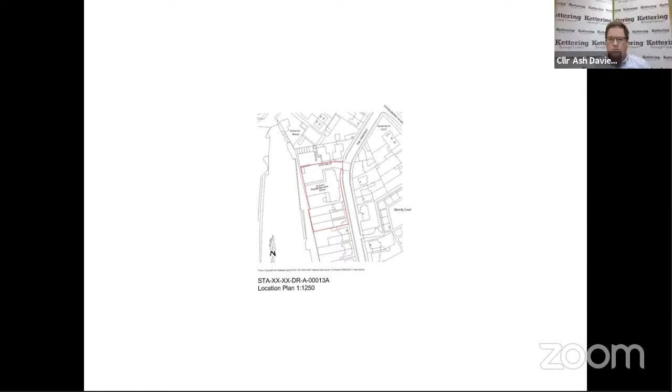This application is on the Crescent in Kettering within the Headlands area. It's an existing care home, St Anne's Residential Care Home. The proposal is for a 2-storey side extension, and to facilitate that, there is a need to demolish 3 dwellings, which you can see within the location plan to the south of the existing care home. Part of the aim of the application is to provide a net increase of 13 ensuite rooms, but also to provide additional dementia care as part of the wider care home offer.

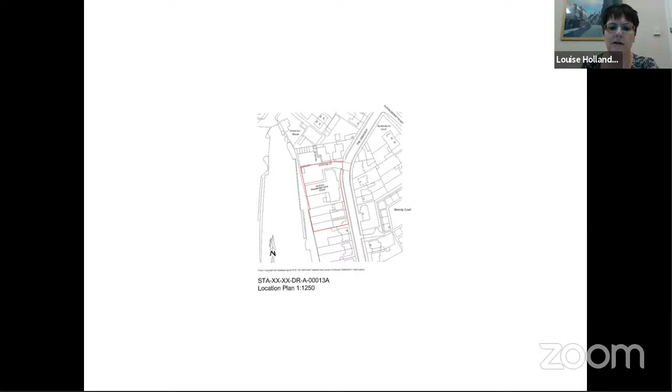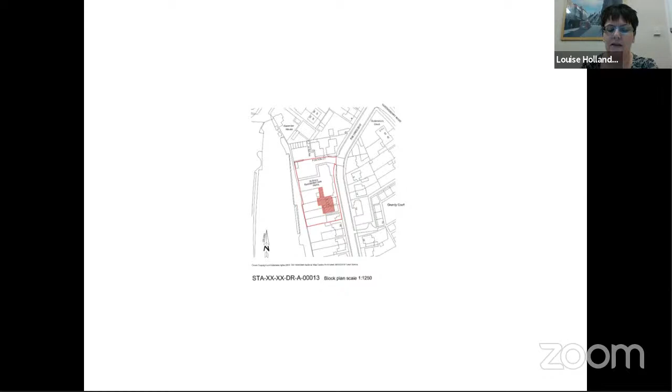There's also enhanced facilities within the care home as a result of the application, and increased garden space. There's also a balcony proposed at the first floor, which I'll come back to, to the rear of the property. If we could move to the next slide, please. This is a block plan showing the location of the 2-storey side extension. As you see, it's covering 2 of the properties to the south, 28 and 30 the Crescent. The other property to the south, number 32, will also be demolished, but that is to make way for an additional secondary access point that will provide access and space for staff parking. So that's essentially the proposal. If we could move on to the next plan, thank you.

As you can see, in terms of the existing care home, it's arranged in a sort of T-shape layout currently. Before we get into more detail of the report itself, just a few comments around the principle and the policies relevant to this particular application. There are a number of applicable policies, and the report is very comprehensive in terms of its assessment of the principle. Overall, officers consider that the application is acceptable in terms of its actual principle.

However, there are a few policies which I'll just mention. In terms of the area action plan for the town centre, there is a specific policy around the area within which this site falls, and that's policy 24, which is within the report. Another relevant policy is a saved policy of the local plan, K16, a specific policy around special housing areas, and the Headlands is one of those particular areas. So in a nutshell, the thrust of those policies is really to protect and enhance the residential character of those areas, and also to protect those areas against unsympathetic non-residential uses.

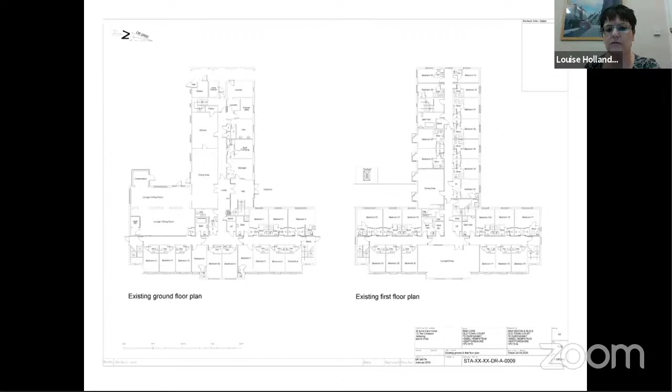Now, the officers have gone into a lot of detail to assess the application against those policies. And although this is not a dwelling house or C3 use, it does have a residential character. It is considered that, taking all those policies into account and also the policies of the JCS, that the principle of the development is acceptable. If we can move on to the next slide, please.

If we could go to the next slide please. This is the first floor part of the extension, the area on the left is the proposed extension. As mentioned, the extension has also allowed the internal reconfiguration of some of the units, which has allowed the proposal to deliver enhanced facilities for existing residents. The report details some of those uses, such as a cinema room, hair salon, and other facilities, as well as additional ensuite rooms.

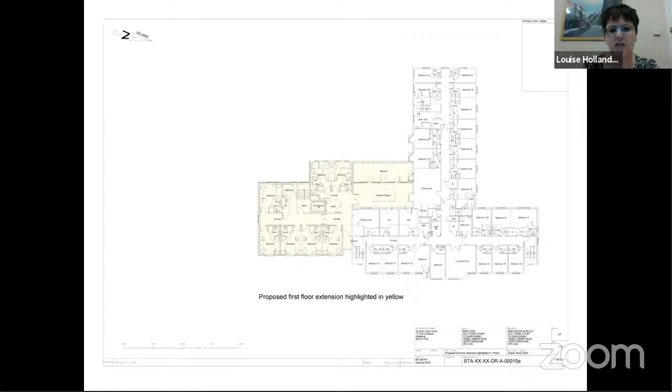If we could go to the next slide please. This is the roof plan of the proposed extension. Next slide please. These are the various existing floor plans of the three residential units that will be lost as part of the proposal. Next slide please.

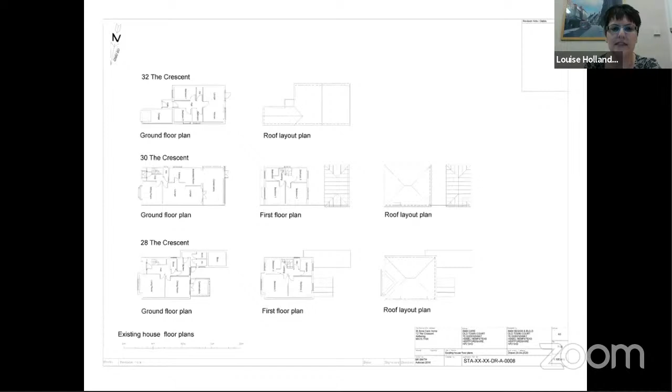This is the proposed site plan. The bluey purpley dot on the plan highlights the location of the balcony, proposed at first floor level. We've provided a blue arrow showing the distance between the edge of that balcony and the nearest boundary with number 34, the nearest residential property. Number 34 has registered an objection to the scheme, citing various concerns set out in your report. The distance of that blue arrow is approximately 26 metres.

The balcony is enclosed on the sides by the two-storey nature of the built form, so any views will be very oblique, looking over potentially to that top area of the adjacent garden. But it obviously provides an enhanced amenity space for the residents.

At first floor level, in terms of other amenity issues, there is on the side of the extension - you'll see it on this plan as a door adjacent to the access road - but at first floor level there is a window. That is conditioned and covered by condition 3 to be obscurely glazed and restricted in terms of its opening, just to stop any potential for overlooking or perceived overlooking of adjacent occupiers.

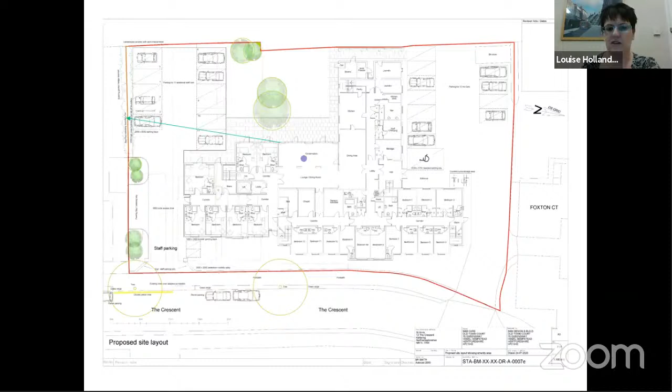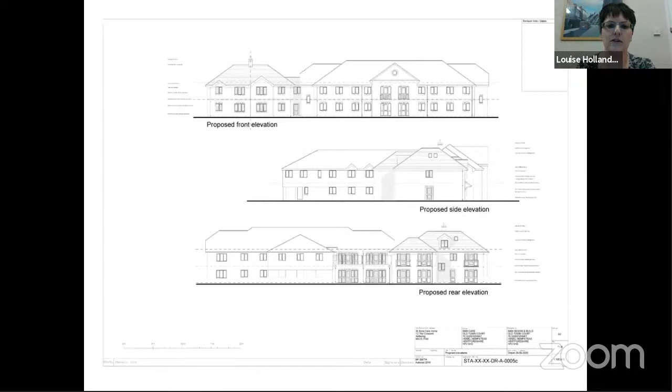This is the proposed elevations, and you'll see there's a linking extension before you get to the main two-storey extension. That's to provide visual separation, a transition into the extension, and also to enhance and maintain the residential character I was talking about before, because with the demolition of those 3 units it's important to retain that residential character, and officers consider that the design proposed does do that.

If we could go to the next slide, David. Just bear with us, Louise. It looks like it's just restarting. That sounds like someone joined on Zoom. Yeah, I think it kicked him out of the presentation there, but it looks like he's good to go now. Lovely, thank you.

So these are the existing street scene at the bottom and the proposed at the top. Again, you'll see, as I explained, the transition into the extension, which is trying to maintain that residential character.

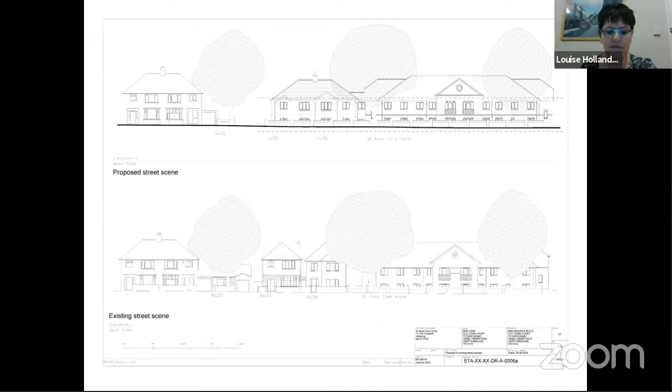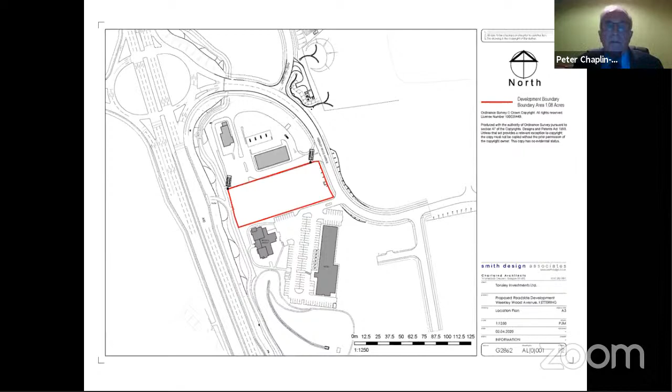Next slide, please, David. Yeah, so this is the land, it's remained fairly vacant and unkempt for quite a number of years. The report mentions its value in terms of any plants and so forth, and it's concluded there is no great value in that regard.

So this is the size of the unit, and it's going to be located towards the bottom of the site, close to the A43. You can see it's essentially a large rectangular shed building with some offices within. Next slide, please.

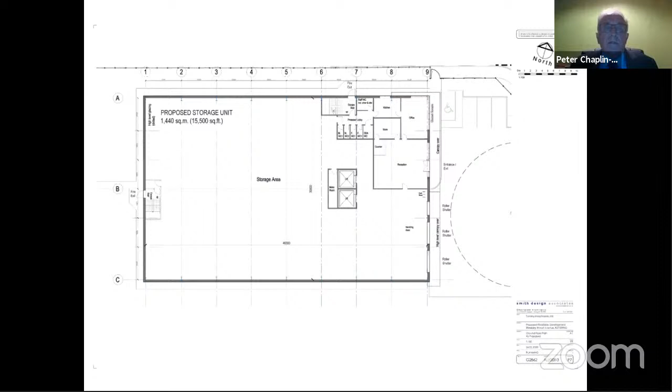So this is another detail, and I'd point out on this plan the access point, which is opposite the access point for the filling station on the north side. The Highway Authority did make a comment about these two access points not being separated by a 20-metre offset, but it's been pointed out in the report and through consultation with the applicant that the speeds of vehicles going to the petrol station and to this site would be quite slow, and it's considered that it wouldn't raise any significant highway concerns. The turning areas and manoeuvring areas have also been demonstrated to be satisfactory.

Just another point to note, towards the southern end there's an area which is subject to a landscape scheme, and I'll come to that in a moment.

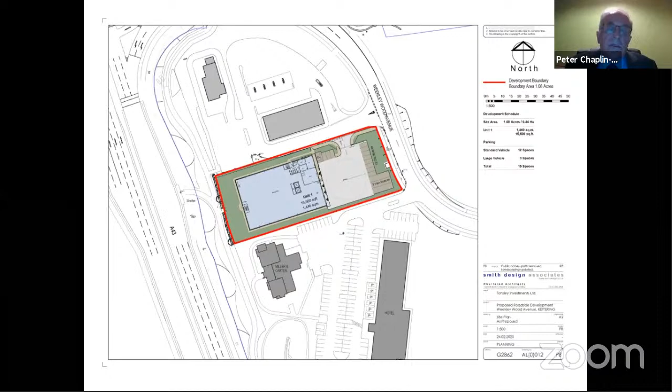So this is the proposed plan, and the point to note here is that the colours have been toned down. The single objection we had from a resident of Kettering was in relation to the appearance of the building, and you can see that there's now only one horizontal yellow strip, reflecting the house colours of the proposed occupier of the building.

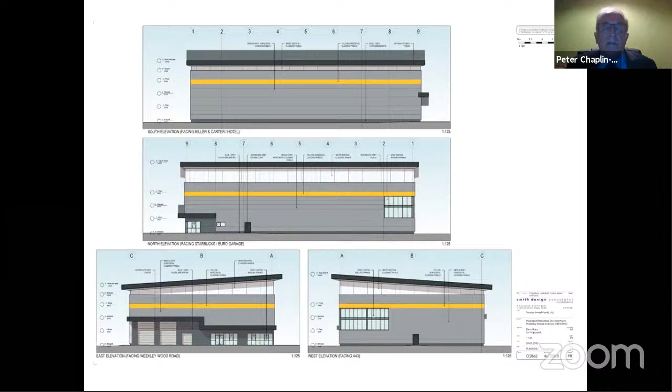So this was the original submission, which we thought had an appearance out of keeping, and that's what's been superseded. You can see the difference between what was eventually agreed with the planning officers and the applicant, and what was initially put forward.

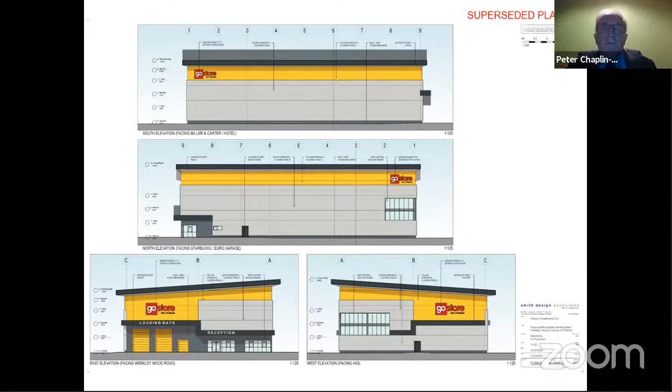I think I'll leave the slides there, please David, and go back to the landscape plan, if I may. So to take you through the officer report, as I've said, the principle of development is found to be acceptable because it's already had outline consent for business use B1.

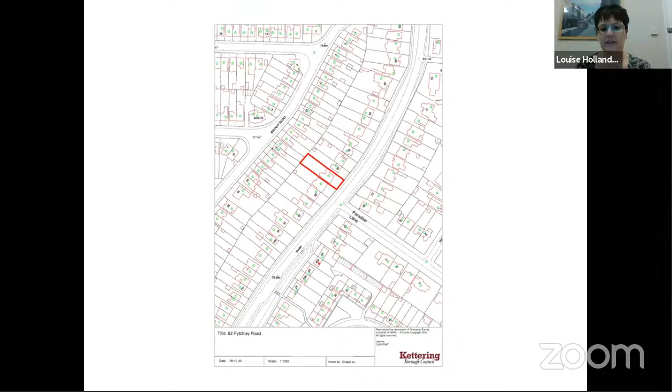Here's the location plan. If we could move to the next slide, please. And the next slide will show the block plan of the proposal. The application is for a single storey side and rear extension, and as you can see, that wraps around the side and then along the entire width of the property. It's also proposed to put 3 roof lights in the rear roof plane.

In terms of what's already on site, you'll see in a moment with the photos that there's an existing garage on the side adjacent to number 80 Pytchley Road, and there's also a conservatory on the rear, adjacent to the other neighbouring property, number 84. Those 2 elements, currently on site, will be taken down to make way for this extension.

You'll note in the report that number 80 has objected to the scheme for a number of reasons which are set out within the report in the comments section, and some of those comments relate to loss of light and overshadowing impacts on their property. Just in terms of the extension, obviously it is a large extension, which you'll see from that block plan, but in relation to the size of the plot itself, it is, we consider, to be a proportionate extension when you look at the overall size of the plot that the application property sits within.

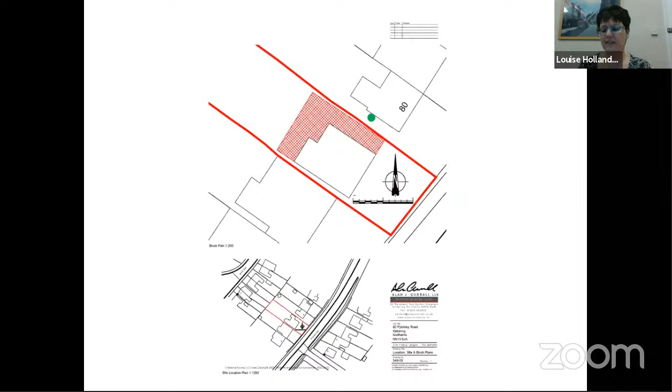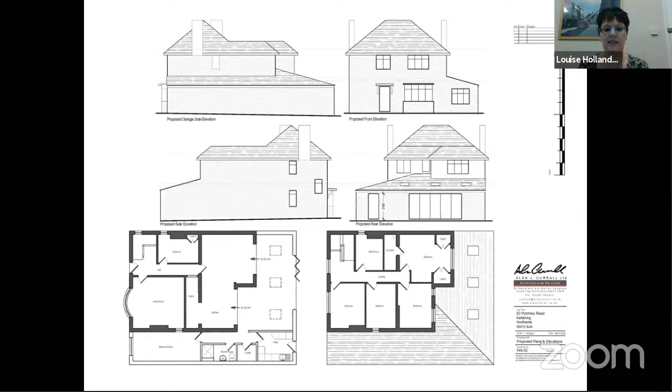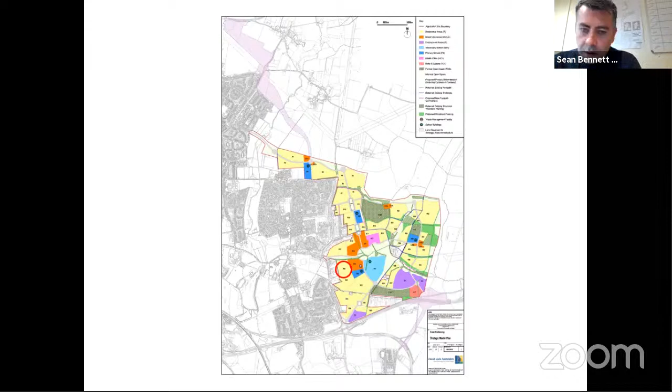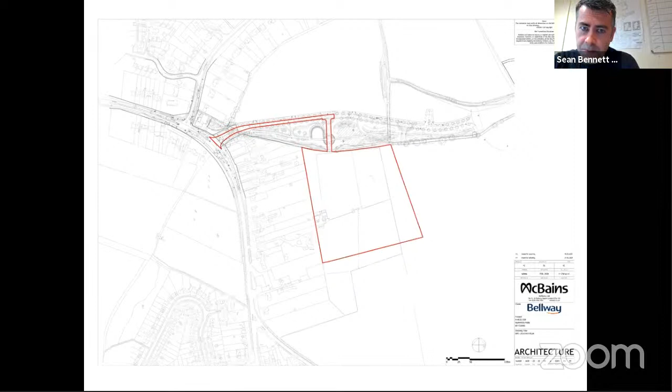The site will be served from the internal development road, which connects to the new access E road interchange close to the junction of Barton Road and Warkton Lane. The proposed linear park lining the distributor road encloses the site's northern boundary, which you can see here above the red line, and that is also underway. Next slide, please. The site is enclosed by the rear garden boundaries of Barton Road and Grendon Drive properties to its western edge.

The application seeks reserved matter approval for 167 dwellings arranged in a geometric layout with a street hierarchy including a primary street which provides site access through the linear park and through the site to adjacent parcels to the east and to the south. The other roads and mews arrangements towards the centre of the site provide secondary and tertiary streets. Access is retained to a paddock at the site's southwest corner.

A pedestrian cycle link is proposed to the southeast corner of the site, giving access to the adjacent district centre and the Hayfield Cross School, which is to the east.

Elements of frontage parking within the layout have been integrated to avoid opposing areas of frontage parking either side. In the mews areas, frontage parking has been provided sufficiently forward of the dwellings to allow a green defensible strip with planting between the house and the parking. The proposal resists a dominance of frontage parking when considered as a whole.

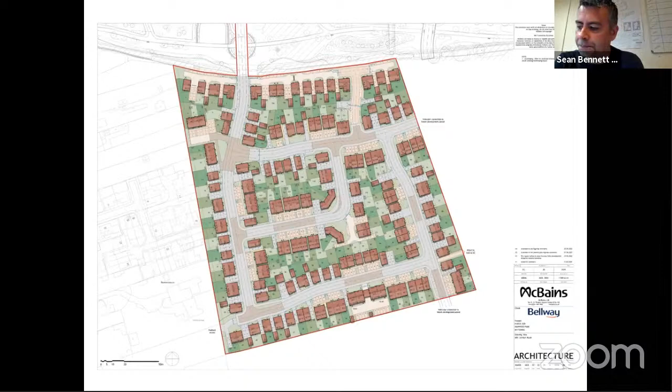This planting plan shows small areas of formal and informal planting, notably on the approach, creating a pleasant green aspect when entering the development. There is provision of wide verges and incidental planting areas at corners. Tree planting is also achievable within the mews areas between parking spaces and on the western boundary with the adjacent neighbours.

The site's northern boundary will also significantly benefit from the proposed linear park, which will provide an attractive planted northern edge. Next slide, please.

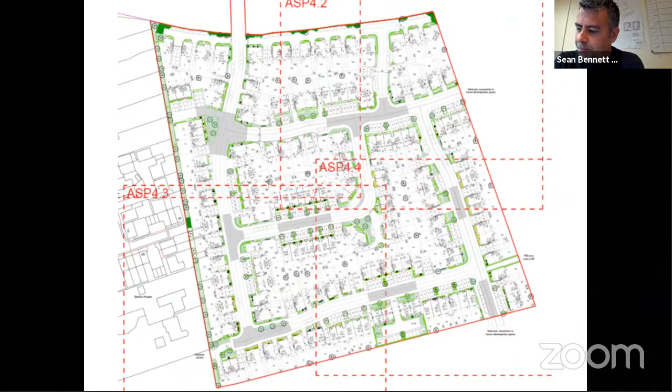This plan shows the materials palette distribution, including light and dark bricks and the distribution of stone dwellings at key viewpoints. Next slide, please.

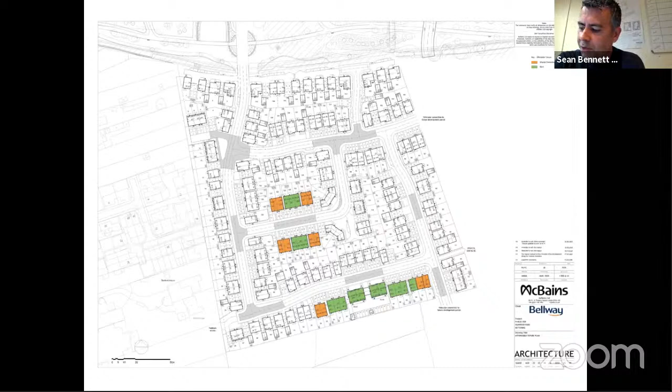This approach is considered correct for this parcel as it respects its proximity to listed buildings and Barton Seagrave Conservation Area, which are less than 500 metres to the west of the site, and is also consistent with the overarching design code in the outline that places the site in the Barton character area.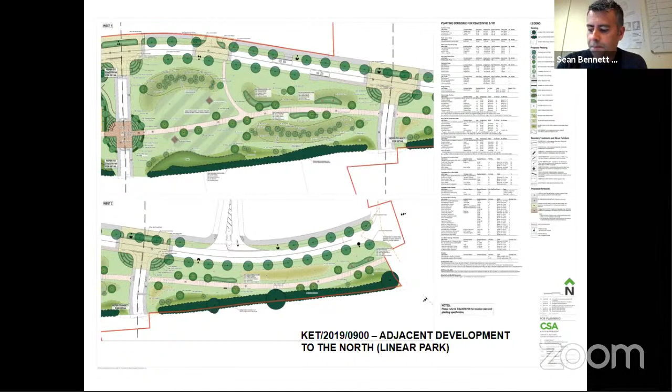Next photograph, please. This is further along that road, where you see the access to the site with the Taylor Wimpey development now on your right-hand side. You can see the progress being made on the linear park, with some retaining walls and footpaths going in there. Next slide, please.

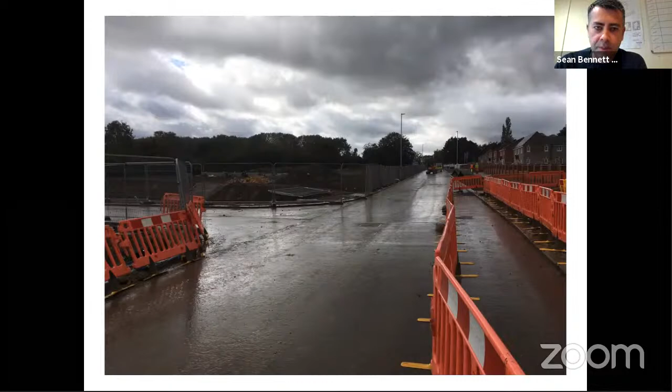This is taken from the access road, looking eastwards along the linear park. You can see the footpaths going in there. And to the right is the hedgerow, which forms the boundary of the site that will be retained.

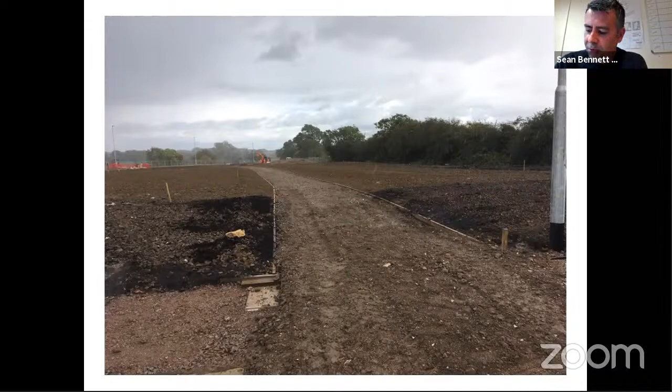Next photograph, please. Now we walk into the site. This is a long distance view taken from within the site facing the rear boundaries of the neighbours.

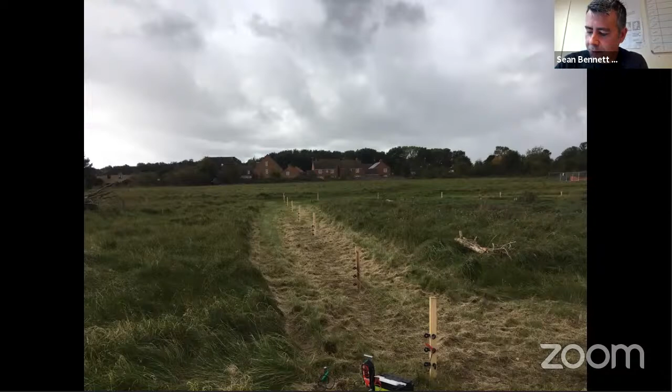The side gable elevation of 16 Grendon Drive, which I mentioned earlier regarding the side facing elevation and non-habitable room windows, is towards the centre of the image, with 11 and 12 Grendon Drive to the right with their back elevations facing the proposal. To the far left of the image is the stone dwelling at 134A Barton Road, which also backs onto the development.

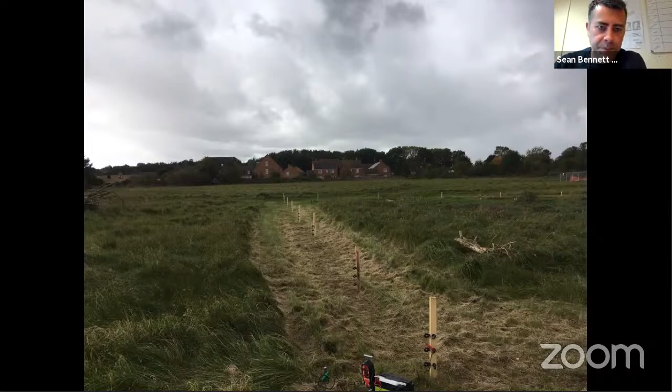The key issues of this proposal are compliance with the outline planning permission, its build quality, impacts on residential amenity, highway safety and sustainability. The submission complies with the constraints and provisions of the outline planning permission, including its approved design code, and provides a well-planned, high-quality layout and design that creates landscape interest and takes opportunities to provide green streets fitting of its suburban location, fulfilling its design code requirements as a Barton character area. The proposal protects neighbours' residential amenity and provides good standards of amenity for future occupiers.

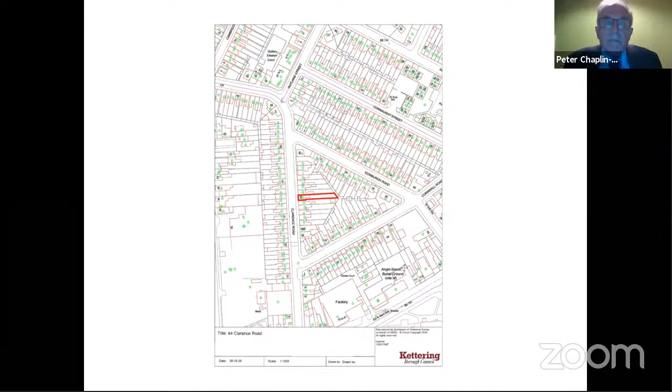Next slide please. Yeah, so these are the drawings, and you'll see at the moment this is not an unusual arrangement where on the ground floor, between the 2 terraced houses, there's a means of access for people to take the bins down in the morning and leave them and take them back at night. Just one correction on the report: on page 44, it refers to refuse storage area shall be within a separate room. It makes sense for the refuse area, the bin stores, to be somewhere within the garden area at the rear, and that can be covered by that condition.

So the proposal is to create these 2 flats with some additional small scale building at the back of the site. Next slide please.

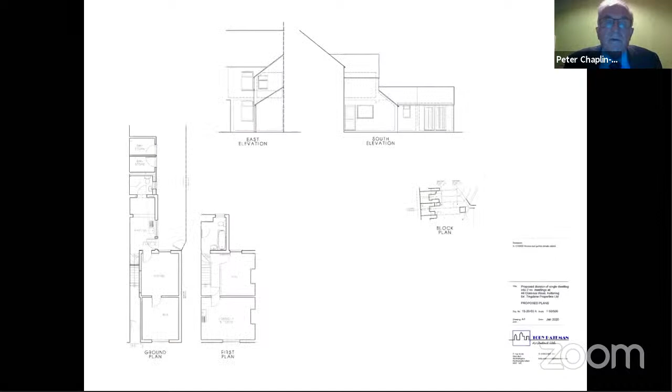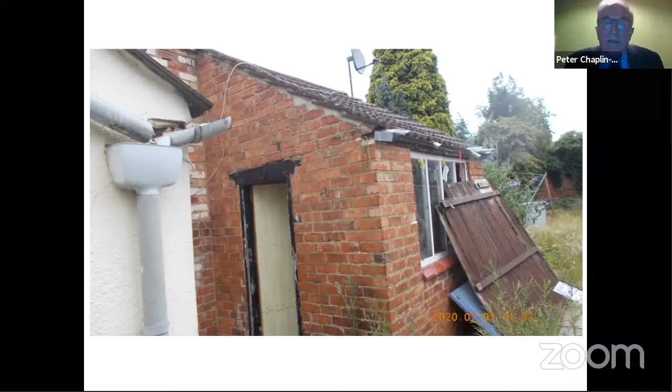Next slide, please. This is taken from down the garden. Clearly it's quite a large area. You can see from there, although it's a bit untidy at the moment, it can be suitably allocated for use by the 2 occupiers.

each flat to have a level of amenity. Next slide, please. That's just another view from the back. So I'll leave the photographs at that.

This proposal is to create 2 single flats, and the issues relate to whether this is a level of development which complies with standards. If it was a single house, you could have the same number of occupiers in the property as proposed under this arrangement.

They're essentially one bed flats, and the size of the units and the size of the flats are referred to on page 50 of the agenda. You can see the sizes for the internal floor space, which meets national space standards.

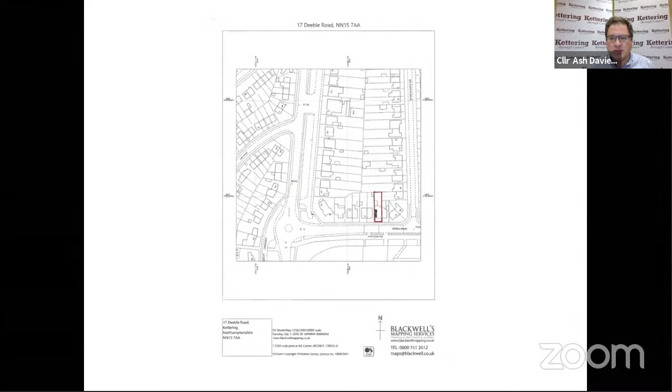That should be there, Chair. Thank you very much, David. So that is good to go. Thank you. So the application site is 17 Deeble Road in Kettering. If we can go to the next slide, please.

It's a proposal for a first floor side extension, which sits above the existing ground floor. In terms of key issues, the main one in this case is the impact on the neighbours at number 15, which is adjacent to the position of that first floor extension. If we could go to the next slide, please.

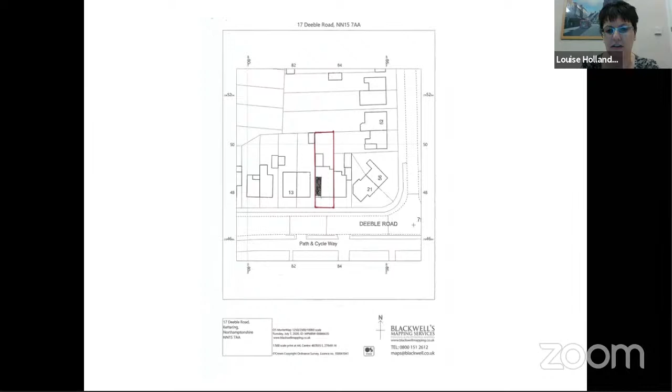And above that is where the extension will sit. In terms of its design, it is set down from the existing roof and it's set back approximately 450 millimetres from the front, so it does read as an extension.

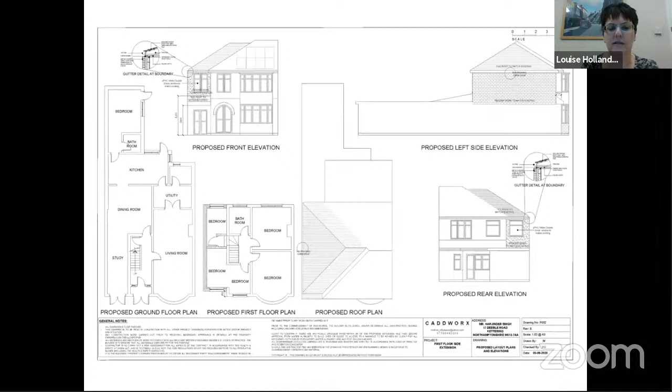The proposed left side elevation is the elevation that will face the neighbour at number 15 Deeble Road. As you will note, there are no first floor windows proposed in that elevation. There is a condition to prevent any further opening should this receive approval tonight. If we could go to the next slide, please.